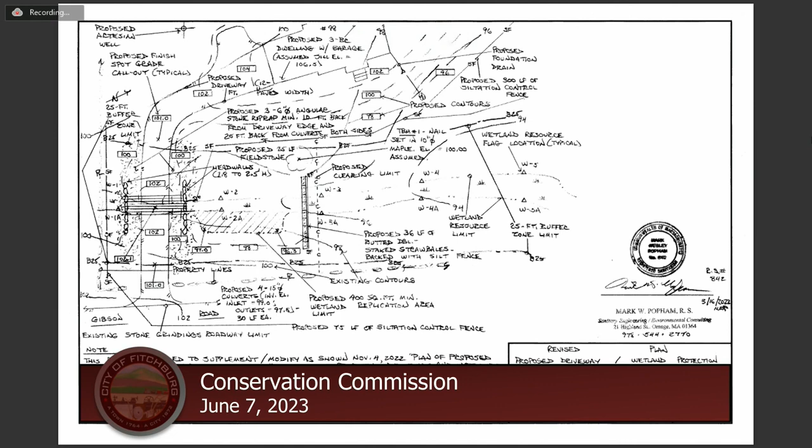So essentially what you have is a crossing for an intermittent stream that's been reviewed by myself and designed by Graz Engineering. The DEP comments that were issued noted a potential jurisdictional stream crossing either under your local regulation or under state regulation, or both - in this case, it's both. This area does qualify as a bordering vegetated wetland stream crossing. The wetland in the area where the stream crossing is proposed is pretty thin. The area has been designed with fieldstone head walls to allow for continued migration of species, and the culverts that will be installed will allow for continued hydraulic maintenance. I understand that Mr. Fletcher has been working with the DPW to ensure it's been designed to their satisfaction. This area does appear to meet state specifications for a wetland crossing.

The replication area that was proposed and drawn on the plan, I examined the area that was proposed. It should take quite readily. It looks like you don't have to destroy a whole bunch of trees in order to do the replication - you can maintain the canopy while doing herbaceous plant mix. In that particular area where the replication is proposed, there wasn't really much of a shrub layer. It was pretty thinly wooded. That's about it for me.

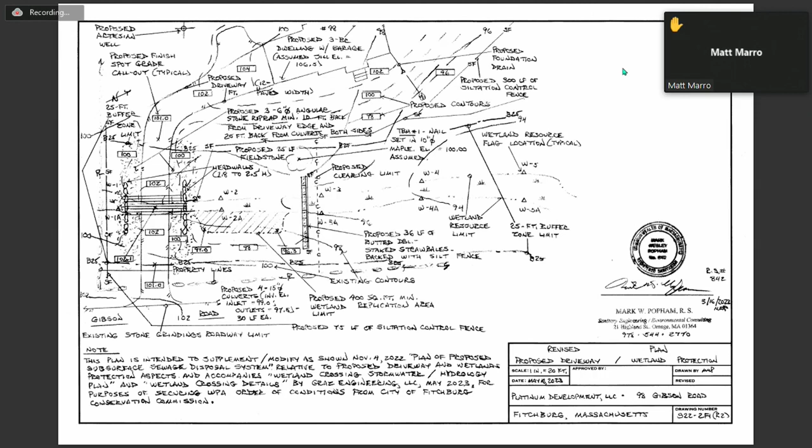Trevor, if you wanted to take over, please feel free. Sure. Yeah, so we came across a couple different designs that we were going through, and speaking with the applicant, it seemed like the best possible outcome would be the smallest possible crossing that we could create to disturb the least amount of wetlands. So we lowered the crossing, and per DPW standards, I spoke with the DPW and their regulations. Unfortunately, they don't really specify between roadway culverts and driveway culverts and the like - they just say all culverts must be designed to the 100-year storm, which typically isn't the status quo for driveway design in other towns that I've worked in.

So we designed as much as we could towards the 100-year storm. To do that with the elevation of the crossing and providing appropriate cover over the culverts, we came up with 4 15-inch culverts that would allow for a 100-year storm to pass without overtopping the driveway.

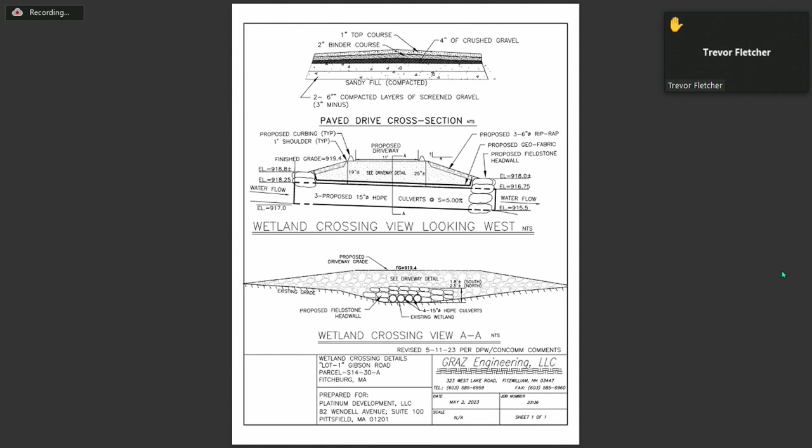I spoke with the DPW about this design, the four HDPE culverts, and he expressed concerns that it was kind of a wide crossing in that area. He said if we take a pipe out, it might help to disturb less of the bank of the wetland channel. So I did an analysis on the same crossing but removing one of those culverts, and that was submitted as the alternatives analysis. That would pass a 50-year storm, which he said would be adequate reasoning to reduce the storm requirement it can pass.

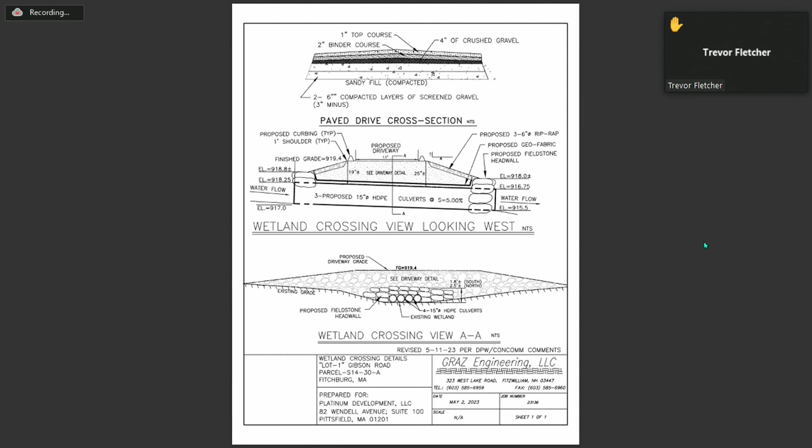So in other words, a 50-year storm being passed is pretty good for a culvert providing a driveway crossing. So they would be okay with that reduction if it affects the channel a little less. With that, I could take any hydraulic questions of that nature if anybody has any.

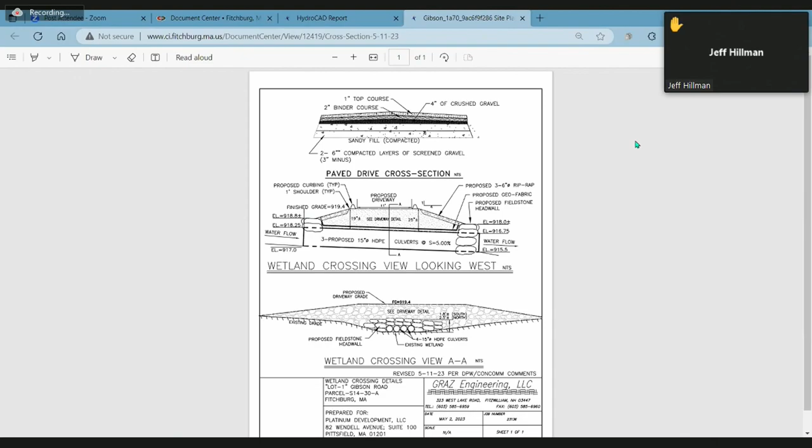There's a lot of issues here, but to speak to the issue on the table, the chair asked about the general performance standards for the resource areas that have been impacted, and I don't know that that was addressed. So there are 5 performance standards when you're impacting a bank. Really there are 3 wetland resource areas impacted, meaning they need to comply with the performance standards for each: bank, land underwater, and BVW, bordering vegetated wetland.

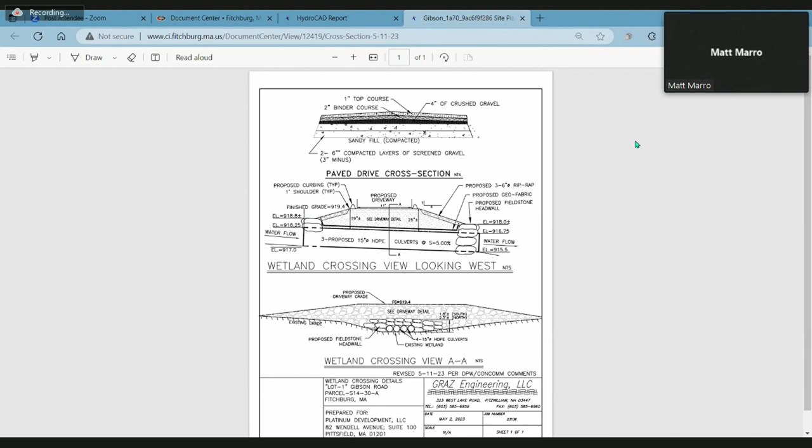So for the bank, there are 5 performance standards. The regulation says any proposed work on a bank shall not impair the following: 1, the physical stability of the bank; 2, the water carrying capacity of the existing channel within the bank; 3, groundwater surface water quality; 4, the capacity of the bank to provide breeding habitat, escape cover, and food for fisheries; and 5, the capacity of the bank to provide important wildlife habitat functions. It goes on and provides a bit more clarity, but there are 5 different performance standards just for bank—and we still haven't talked about BVW or land underwater.

One thing we've talked about is the ability of the stream to continue to carry the capacity of the stream. Performance standard number 2 is the water carrying capacity of the existing channel within the bank. They're saying that if they put the culverts in, it'll meet the 50-year storm event, but I don't know how, because the performance standard doesn't talk about which storm event, it just says the water carrying capacity of the existing channel within the bank. Obviously the idea is they don't want a culvert installed that's going to impound water and cause flooding somewhere else. So I don't know that this performance standard has been complied with, and the other performance standards haven't even been addressed. I'll stop there, and again there are a number of other issues to discuss tonight.

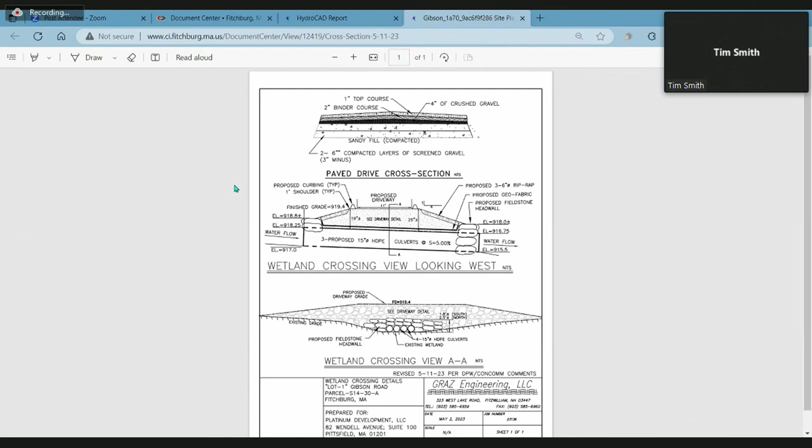Mr. Marro, do you have any comments related to that? Are you Mr. Marro's representative? Is he your engineer now, or your environmental consultant? Mark Popham's not here tonight, just Matt and Trevor. Okay, Matt, Mr. Marro? Yes, I'm here. Part of Tim's presentation cut out, so I didn't catch everything he said. I do see Mr. Popham is signed in. Okay, then yes I am here, actually. Okay, well let's let Mr. Popham, if you'll give us some grace here. Mr. Popham, go ahead.

Basically, in terms of the performance criteria, I believe you have been submitted an updated project narrative, which does discuss the performance criteria, so you should have that in your Dropbox documents.

I had prepared revised notice of intent pages and a revised narrative. And when was that submitted? I believe Mike could answer that, but the 31st with the rest of those documents. Was it submitted to the Community Development Department or DPW? It's been in the email that I sent you.

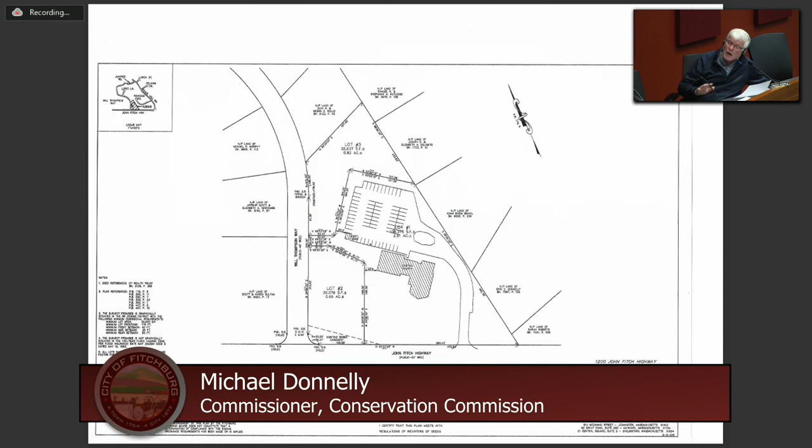So the question is, did the Conservation Commission address the wetland system uphill from the lower basin? And the answer was no. We're quite clear that we recognized the wetland on the corner of Will Thompson Way and there. Did we carry that wetland up in the rearage of those 2 lots? No. But we believe that they are there.

The hay bales and silt fence depicted on the plan went up there. Yep. Mike, this is Tim speaking. In the order of conditions, remember they asked us if they could continue to clean out the stream that flows around the parking lot, and we gave them permission to do so, recognizing that it was a wetland resource area.

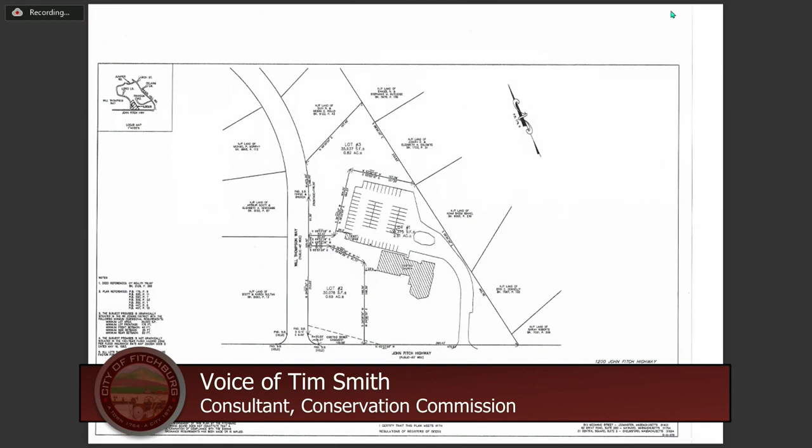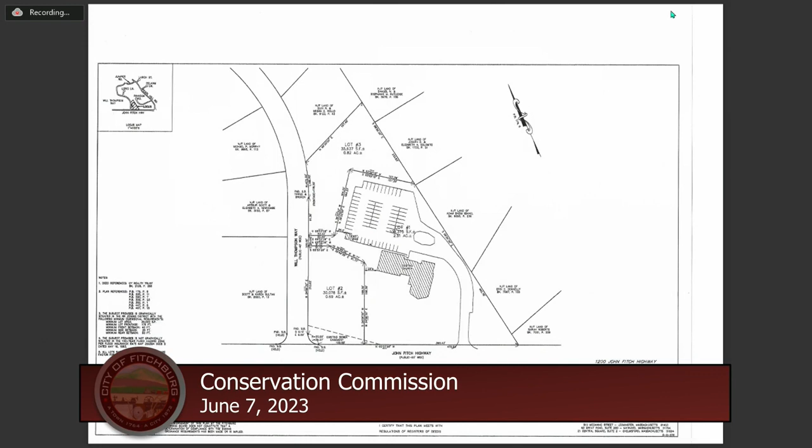So it's in the order of conditions. We recognize that there is a wetland resource area around that parking lot. So quite simply, we're looking for an RDA, and we'll respond after that request. We'll be able to clarify whether he has to do a full-blown NOI.

Right, because we have no idea. Depending on where he sites the house on that lot, it's going to determine whether or not we have any jurisdictional area. All right, so Madam Chair, then Herlin and I can work on sending a letter out to the developer to ask him to at least submit

an RDA. I don't even know, did he tell you if he's got site plans for that third lot available? He's waiting for that, an RDA accompanied by a site plan, a construction site plan. An RDA accompanied by a construction plan. He is waiting for that request.

Thank you. Okay, we'll work on that. All right, so moving forward. What do we have, an order of condition for the Coggshall Park Mirror Lake accessibility. What have they done? Right here.

Did they get more, I thought we were just, 10/4/2021. On behalf of the Conservation Commission, Mike O'Hara signed an order of conditions on 8/31/2021, and they didn't get it, or they originally came before us. Has it lapsed? Has it expired?